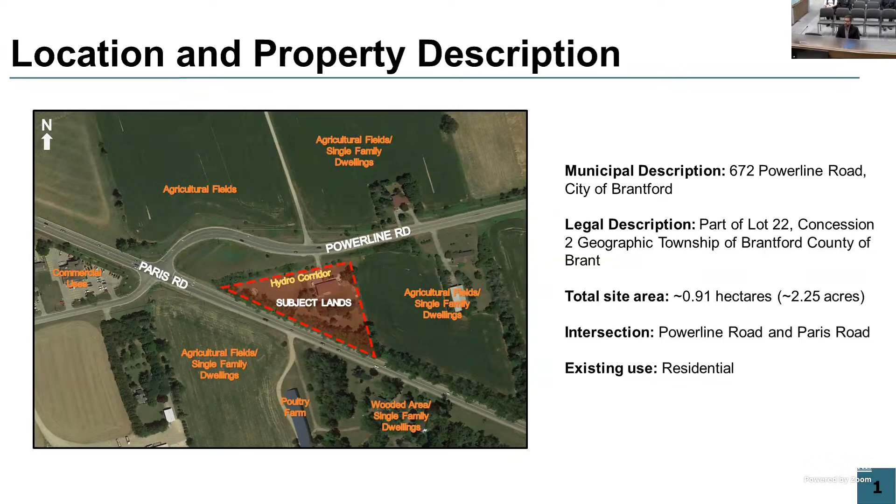The location and property, as you can see in front of you, is located to the southeast of Paris Road and Powerline Road. It's an existing single detached residential dwelling. The subject property has just under 1 hectare of land and just about 2.25 acres of property. It is currently used as a residential dwelling, and the property features some vegetation. Next slide.

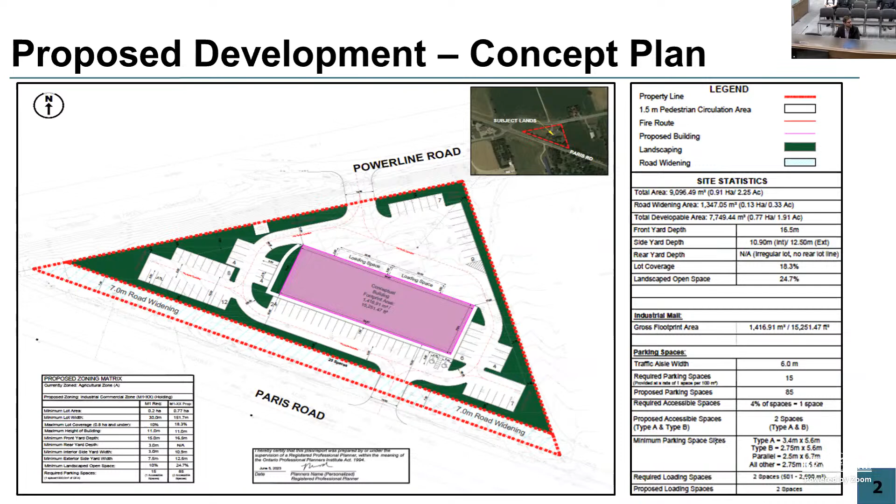The application that's been submitted before you is to advance a zoning bylaw amendment application to establish employment-based uses and employment supportive uses. The plan in front of you is a conceptual plan of what potentially could occur on the subject property, but by no means is that the long-term vision for the property. The intent of the application is simply to establish the uses and the marketability of the site, given the evolving employment uses that are starting to locate themselves in this area, and to be consistent with the official plan policies of the City of Brantford official plan. Next slide.

In reviewing the planning policy, we looked at the Provincial Policy Statement as well as the Places to Grow plan. The PPS establishes that a mixed range of employment, institutional, and broader mixed uses is to be directed to areas of employment, and these areas should also establish opportunities for a diversified economic base, and support, protect, and preserve employment areas. The application has been found to be in conformance with this.

The growth plan similarly looks to promote and protect employment areas, as well as improve upon underutilized employment areas. Critically, it's important to maintain the availability of sufficient lands to accommodate employment forecasts. The additional uses proposed within this application are seeking to do just that, and therefore it's in conformance with the growth plan.

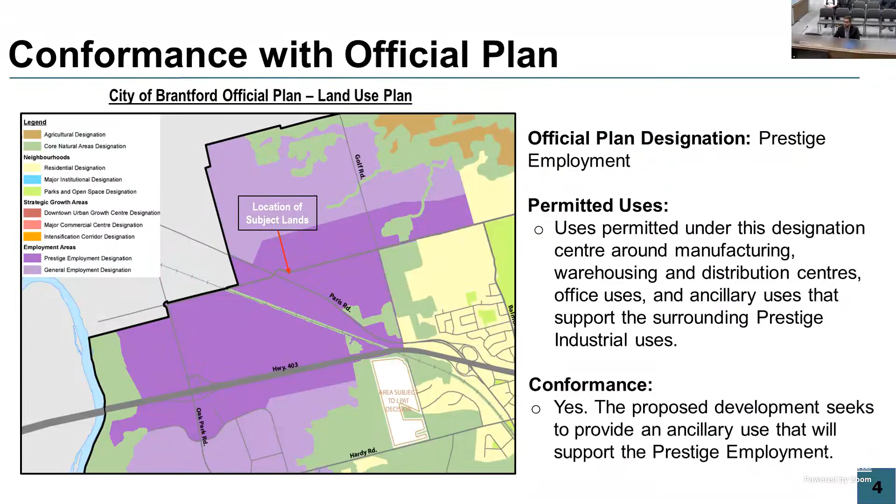In coordination with city staff, we're also proposing the establishment of a holding provision to ensure that the city's needs and requirements are satisfied prior to the development of the subject lands. This includes entering into a site plan agreement with the City of Brantford, ensuring that all servicing issues, financial or otherwise, are satisfied, and that a transportation impact study be completed to the satisfaction of the City of Brantford. This is largely due to the ongoing environmental assessment and transportation assessments that are going on for this area now.

We are supportive of the recommendations put forward by planning staff and recommend that their endorsement by planning committee occur. We believe the applications are consistent with the PPS and conform to the growth plan, that the application conforms to the official plan and specifically the prestige employment designation. The proposed application is seeking to establish just minor updates to the zoning bylaw, which again is in line with the city's efforts in their update to the zoning bylaw amendment. As mentioned, the proposed holding provision will ensure that the analysis of the ultimate development of the lands occurs in coordination with the city's ongoing transportation assessments. Thank you, that's it.

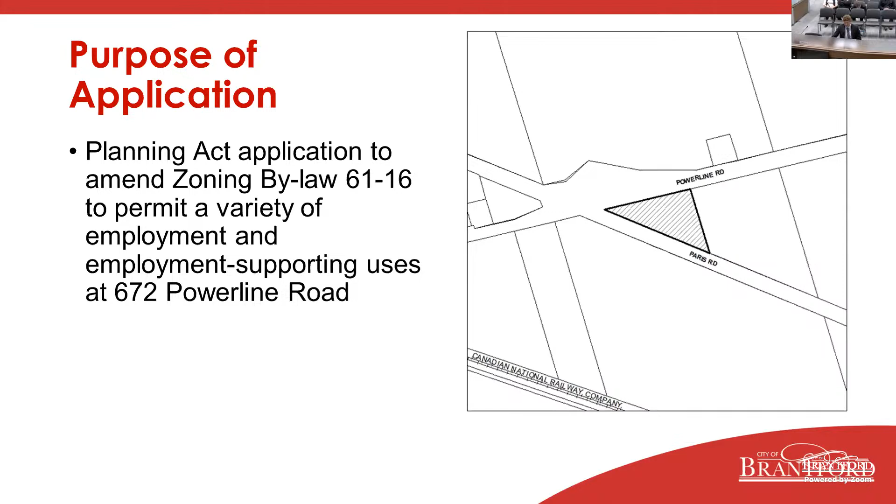The subject lands are located on the southeast corner of the Paris Road and Powerline Road intersection and have an area of approximately 2¼ acres and 154 meters of frontage along Powerline Road. Lands currently contain a single detached dwelling and an outbuilding, and those subject lands are surrounded by agricultural uses directly in all directions and a mix of industrial and commercial uses further west and northwest.

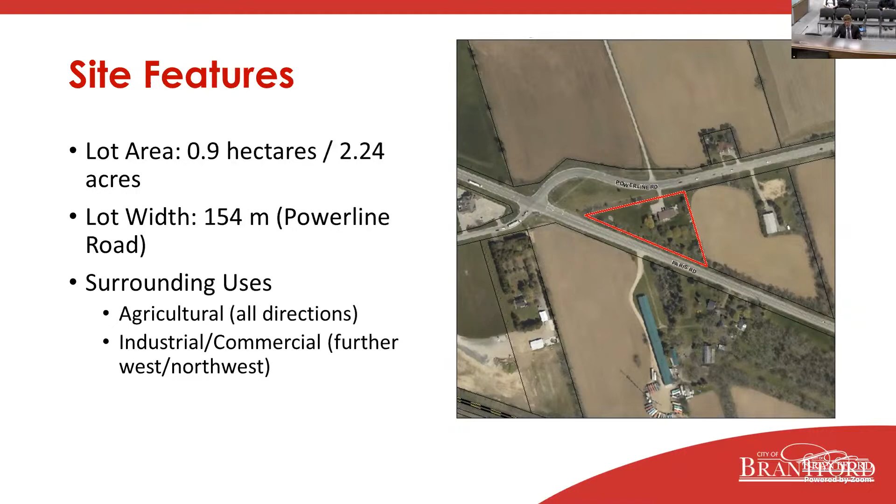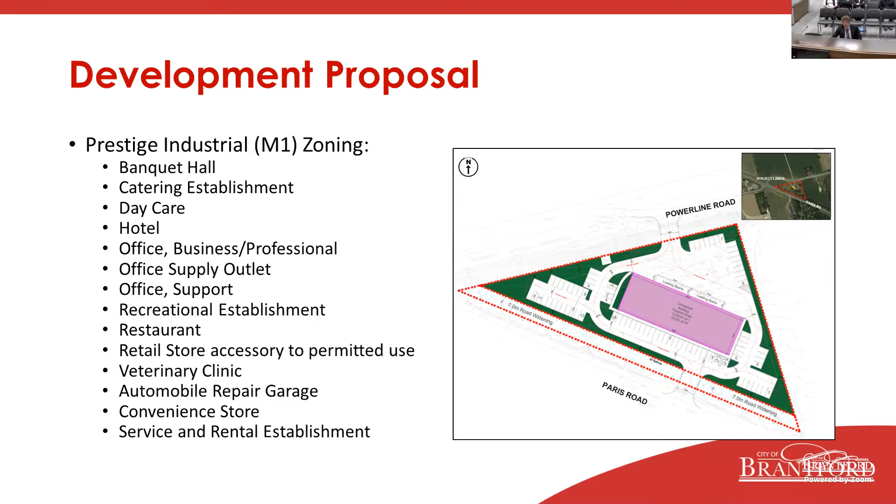The lands are designated prestige employment in the official plan, and it is within the designated greenfield area. The designation permits employment uses such as manufacturing, research and development facilities, warehousing, distribution centers, as well as the ancillary uses that specifically support prestige employment uses, such as hotels, banquet facilities, restaurants, automobile service centers, and convenience retail, as the applicant has applied for. The minimum density target here is 25 jobs per hectare.

These lands were previously in Brant County, but were annexed in January 2017 into the city of Brantford. Through the boundary expansion agreement, these lands continue to have the same zoning until a new comprehensive zoning bylaw is in effect. The lands are presently zoned agriculture, and the applicant is proposing the prestige industrial zone with a special exception number, limiting the uses to what was shown on the previous slide.

No site-specific reductions are sought at this time, so no reduction to side yard or rear yard. And the holding provision that's proposed will ensure that development does not occur until servicing is in place and the appropriate studies and planning approvals have been undertaken.

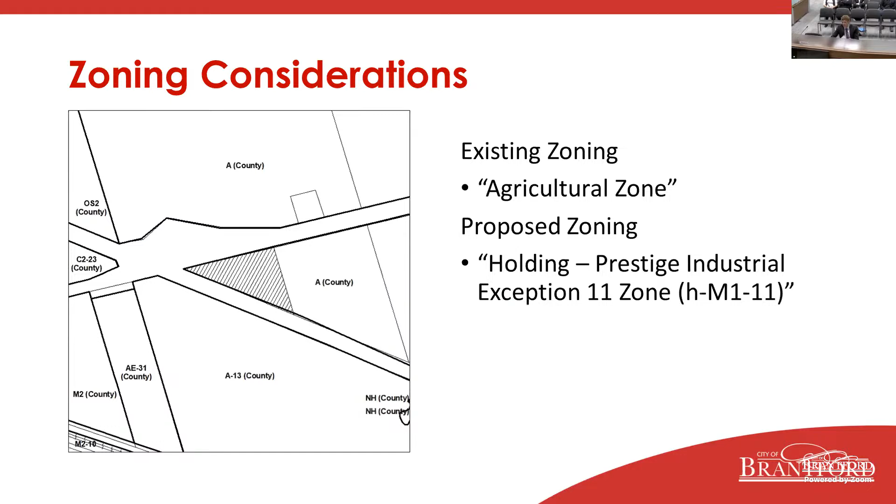The lands are awaiting municipal service installation, and as such, a holding provision is required to restrict development until there's adequate provision of water and wastewater services. The environmental assessments looking at that will likely conclude next year. However, servicing in front of these lands are a few years away still.

A transportation impact study is required to be completed in support of the proposed development that takes into consideration the ultimate use of the site and the planned transportation network improvements that the applicant alluded to earlier.

The development is subject to site plan control, which will allow for a detailed review of the proposed development, including placement of building, parking areas, and engineering design elements.

I'd like to conclude that this application is consistent with the provincial policy statement, the growth plan, and the city's official plan. The holding provision will ensure that orderly development of the lands occurs when there's adequate provision of municipal services and appropriate planning approvals are in place. Planning staff recommend that zoning bylaw amendment application PZ 0323 be approved. Thank you, and I'm happy to answer any questions.

Good morning, everybody. First of all, thank you, Mr. Chair, councilors, staff, and members of the public. My name is Tasha Adair. I am an intermediate development planner with the city, and I will be presenting the zoning bylaw amendment application for 380 to 384 Erie Avenue.

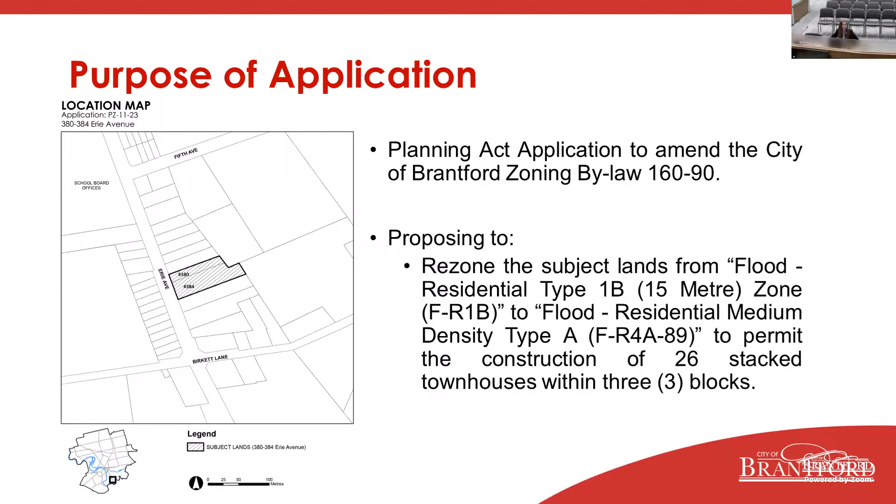This amendment will facilitate the construction of 26 stacked townhouse units within 3 blocks. It will also facilitate site-specific amendments, which will allow for modifications to the permitted uses, the minimum lot area, front yard, and side yard setbacks. The subject lands are located on the eastern side of Erie Avenue, north of Birkett Lane. The subject properties have a combined area of about 4,450 square meters and currently contain 2 single-family dwellings, which will be demolished to facilitate this development.

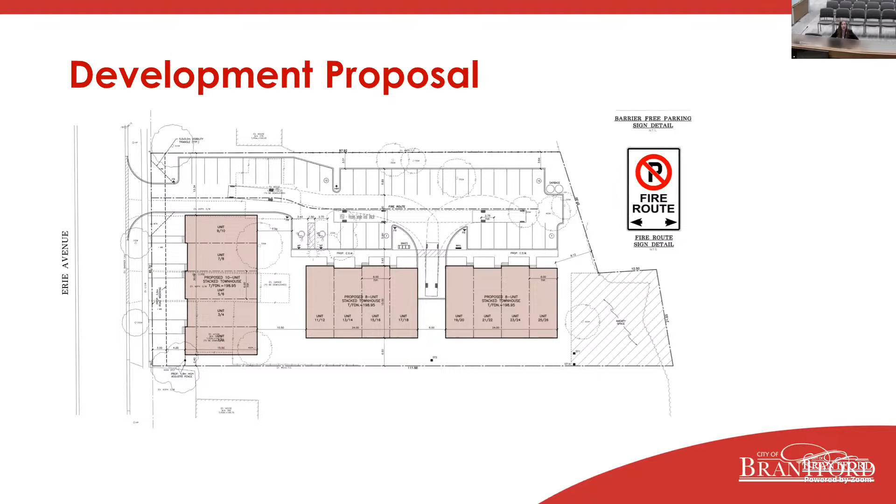This is the site plan on the screen here, which details the 26 stacked units. There would be 10 units towards the western block, and the other 2 blocks will have 8 units each, making 26 total.

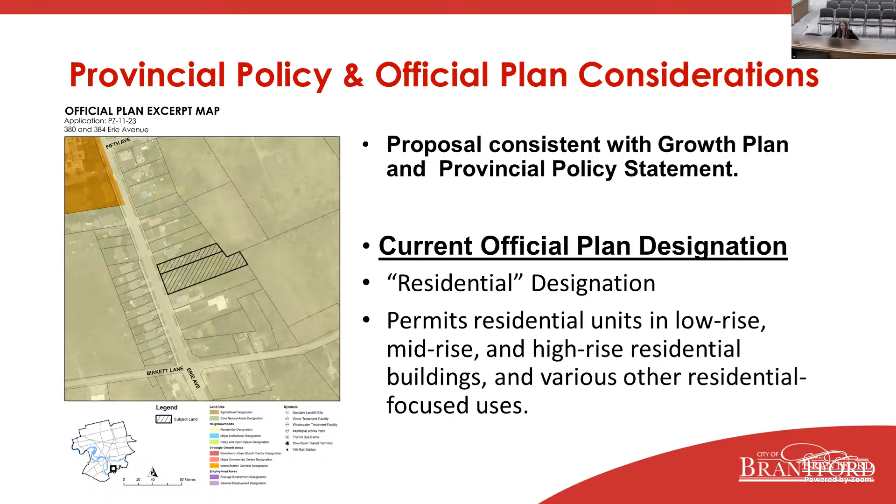The lands are designated as residential in the official plan, and the application was evaluated with respect to the provincial policy statement, the growth plan, and the official plan, in which staff have determined that the proposed development does conform.

As Bob had mentioned, the subject lands are currently zoned F-R1B, which is the flood zone residential type 1B. The proposed zone will be the flood zone residential medium density type A, F-R4A, with site-specific designation 89. In consultation with the ward councilors, a neighborhood meeting was held on August 9th, 2023, as Bob had mentioned.

At the time of writing the staff report, no comments had been received from the public. I do want to note I did get a phone call yesterday afternoon from a neighbor who had some questions about the development, specifically pertaining to the future road widening of Erie Avenue, as well as pedestrian access into the site. It's my understanding that the member of the public should be here today to ask the questions as well.

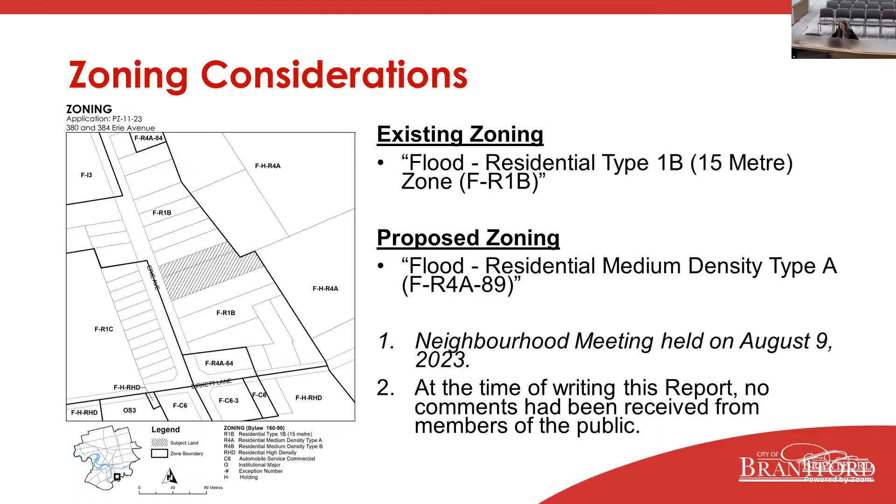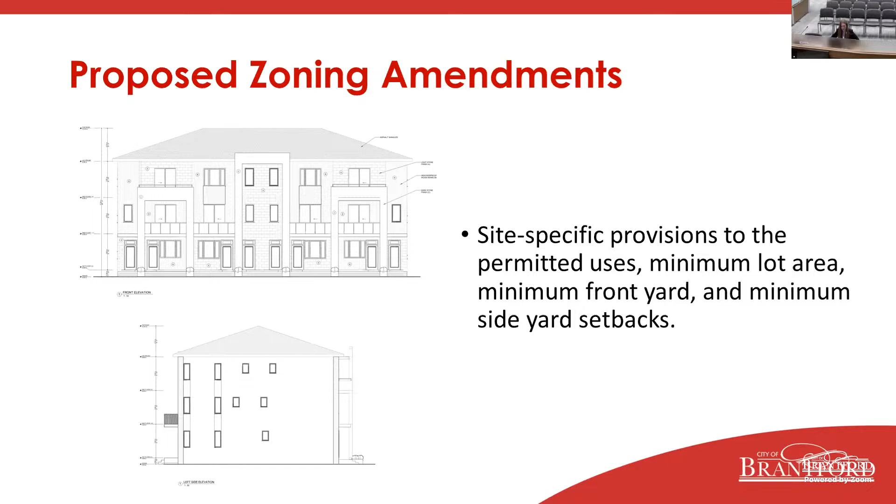As stated, the development will feature site-specific provisions for permitted uses, minimum lot area, front yard, and side yard. In terms of development considerations, we've looked at the permitted uses, lot area, front yard, and side yard.

In terms of the R4A zone, it does not currently permit stacked townhouse dwelling units. However, block townhouse dwellings and street townhouse dwellings are permitted. Stacked townhouse dwellings are defined in the zoning bylaw but are not permitted as of right in any zone without amending the bylaw. The new zoning bylaw project will look into this in further detail and will consider permitting this common built form in the appropriate zones in the future.

In regards to lot area, the bylaw requires 185 square meters per unit. For the 26 proposed units, there will be a lot area of 4,448 square meters, which represents a minimum lot area per unit of 171.1 square meters. In total, a 13.9 square meter reduction per unit is proposed.

In regard to the front yard, the bylaw requires 6.0 meters or the established building line, whichever is lesser. The proposed development features a minimum front yard of 4 meters, which represents a total reduction of 2 meters.

Lastly, with the side yard, the bylaw requires that a front or exterior wall of a block townhouse shall maintain a side yard of 7.5 meters, and that an exterior wall of a block townhouse dwelling shall maintain a side yard of a minimum of 3 meters. The proposed development is proposing side yards of 13.34 and 2.4 meters. The 2.4 is what will require the amendment, representing a 0.6 meter side yard reduction.